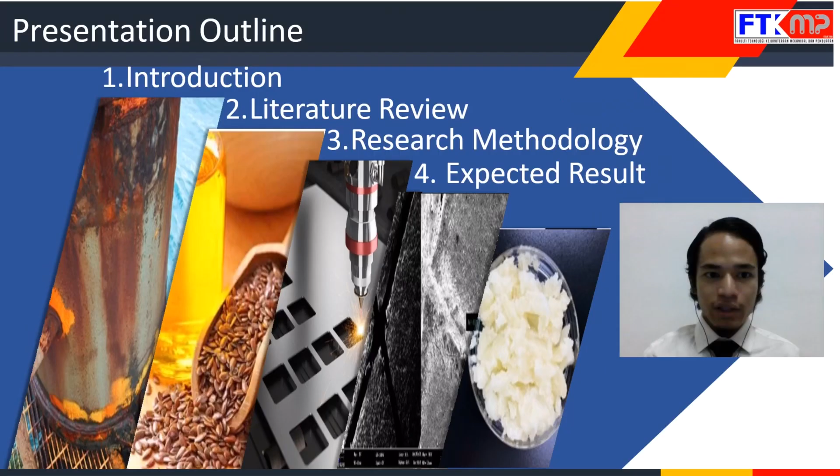My project is for PSM one. My topic is the comprehensive study on selective laser sintering 3D printer, polyamide recycled composition, and dimension measurement accuracy effect on automotive application. This is my main content.

Many in the industry now recognize 3D printing as a manufacturing process with widespread use. This 3D printing uses various materials like plastic and metals to make three-dimensional goods layer by layer based on a digital model, rather than using physical labor and mechanization. There's been an enormous expansion in this field, with dozens of equipment manufacturers and hundreds of thousands of 3D printed items already on the market.

What all of these processes and technologies have in common is the manner in which production is carried out, layer by layer in an additive process, which is in contrast to traditional methods of production involving subtractive methods or molding, also called casting processes.

My research of 3D printing to be used is powder bed fusion, which is selective laser sintering (SLS). This method uses either an electron beam or laser to melt or fuse the material powder together. The material used in this process is polyamide 12.

Selective laser sintering (SLS) is an example of the powder-based 3D printing technologies, and selective laser sintering can be used to create metal, plastic, and ceramic objects.

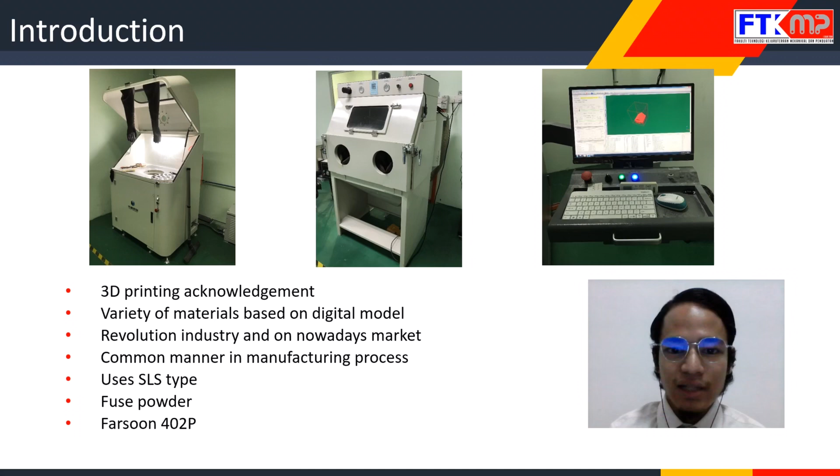My study evolved into three problem statements. The first one is SLS polyamide 12 has a grainy surface. The second one is the necessary dimension may not be obtained due to shrinkage. And the last one is which polyamide 12 composition percentage is the superior one.

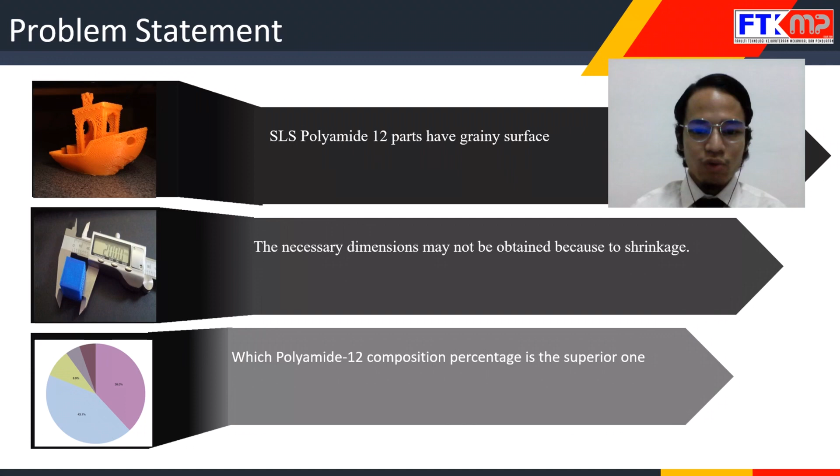My study comprised of three objectives. The first one is to optimize the composition of virgin material, unsintered material, and recycled material of polyamide 12. The second is to obtain high precision and accuracy of the produced part. And the third one is to acquire the guideline for a superior composition of polyamide 12.

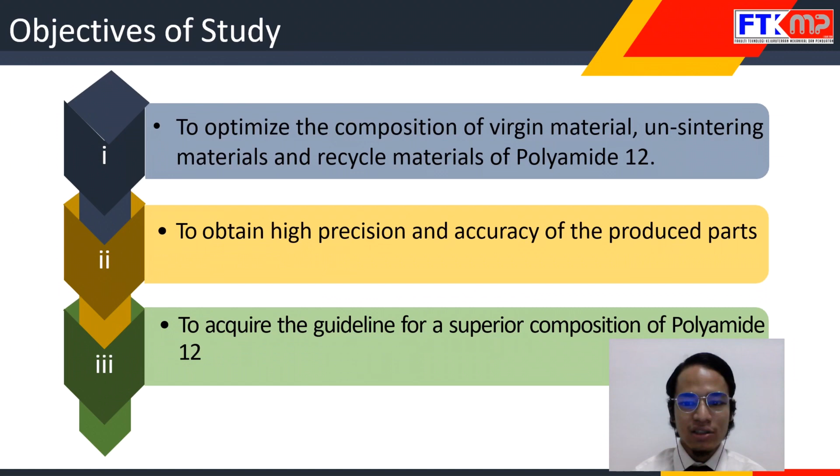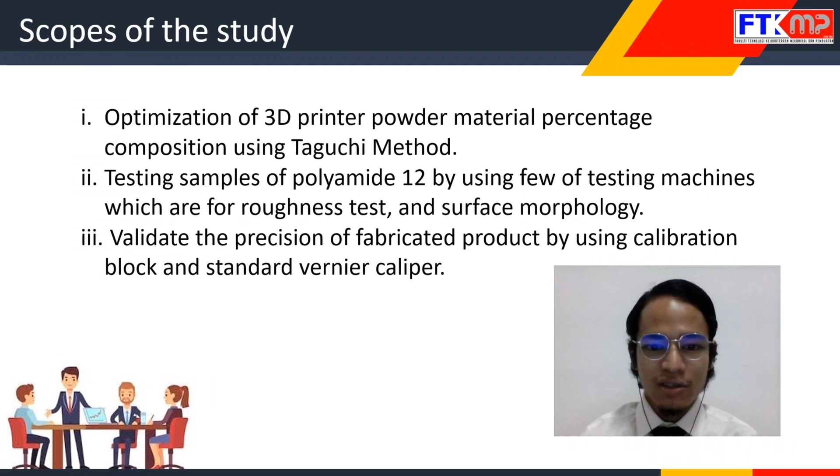Scopes of study: first is optimization of 3D printer powder material percentage composition using the Taguchi method. Second is to test the sample of polyamide 12 using a few testing machines, for roughness test, surface morphology, and dimension accuracy. And the third is to validate the precision of the fabricated product by using a calibration block and standard vernier caliper.

Literature review part: the first question is what types of 3D printing technologies are used nowadays. The first one is binder jetting. Binder jetting is a rapid prototyping and 3D printing process in which a liquid binding agent is selectively deposited to mix powder particles. The second one is directed energy deposition, a more intricate printing process commonly used to fix or add additional material to existing components.

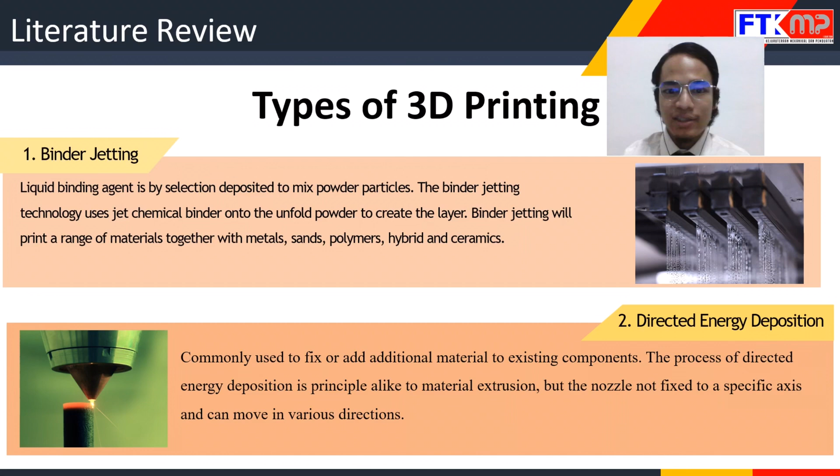The third one is material extrusion. Material extrusion-based 3D printing technology can be used to print multicolor and multi-material printing of plastic, living cells, or foods. This process can create totally functional product parts. Fused deposition modeling (FDM) is the first example of a material extrusion system.

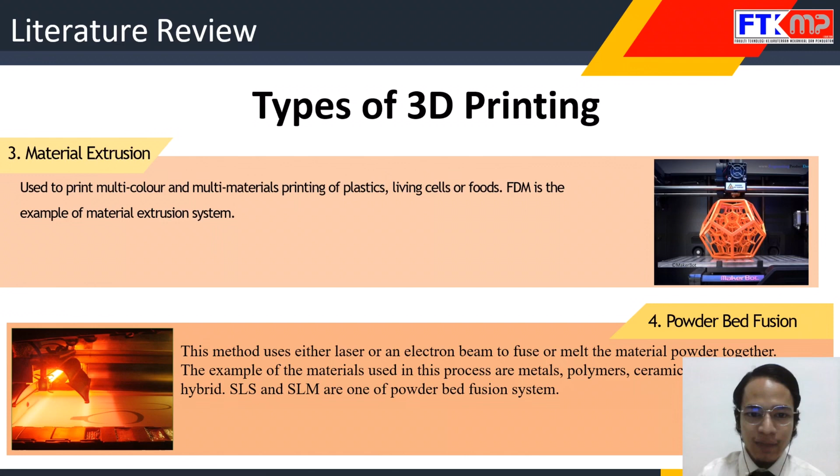The fourth one is powder bed fusion. The powder bed fusion process comprises selective laser sintering (SLS). This method uses either a laser or an electron beam to fuse or melt the material powder together. Examples of materials used in this process are metals, polymers, ceramics, composites, and hybrids. Selective laser sintering is the core example of powder-based 3D printing technology. Powder bed fusion is divided into two categories: selective laser melting and selective laser sintering.

The fifth one is material jetting. According to the ASTM standard, material jetting is a 3D printing process in which drops of build material are selectively deposited. In material jetting, a printhead dispenses droplets of photosensitive material that solidifies, building a part layer by layer under UV light. Simultaneously, material jetting builds components with fully smooth surfaces and high dimension accuracy.

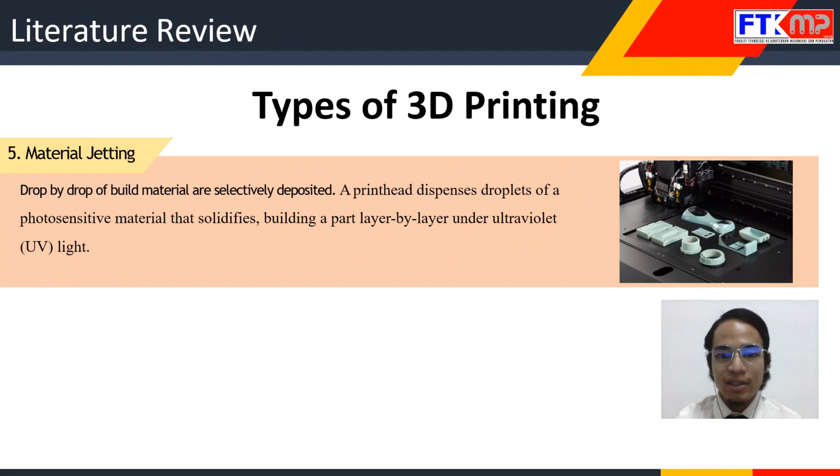Application materials for each 3D printer: the second one is SLA, and the third one is SLS. Each of these 3D printers has its own advantages, disadvantages, applications, and materials.

The application of FDM is mostly for basic proof of concept models. SLA is used for functional prototyping, pattern molds and toolings, dental applications, jewelry prototyping and casting, and model making. SLS can be used for a variety of things such as functional prototyping, short run, bridge, or custom manufacturing.

The typical materials for these 3D printers: for FDM, standard thermoplastics such as ABS, PLA, and their various blends. SLA uses many types of resin and thermosetting plastics—standard engineering, ABS-like, PP-like, flexible, heat resistant, castable, dental, and medical biocompatible types. SLS, as we know, typically uses nylon 12 and nylon 11, and other composites.

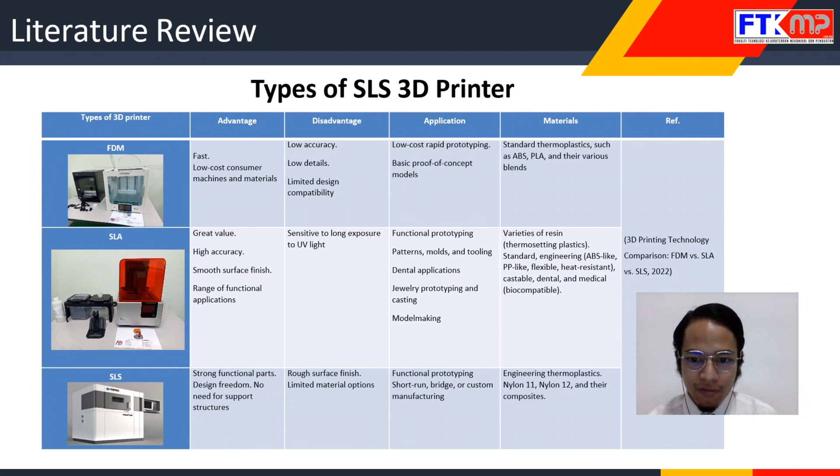There are 4 main tests that we run for my specimens. The first one is a hardness test. We use the Mitutoyo Rockwell hardness test to determine the hardness of the material by measuring the net increase in imprint depth as a force is applied. Values such as R, L, M, E, and K scales are often used to represent the hardness number, which have no unit.

The next test is surface morphology. We use SEM, the scanning electron microscope, which is a tool for creating images of the otherwise invisible world of the microscope—the invisible world of a microspace. SEM has the ability to magnify an object up to 300,000 times. An SEM image typically includes a scale bar, which is used to calculate the size of the image feature.

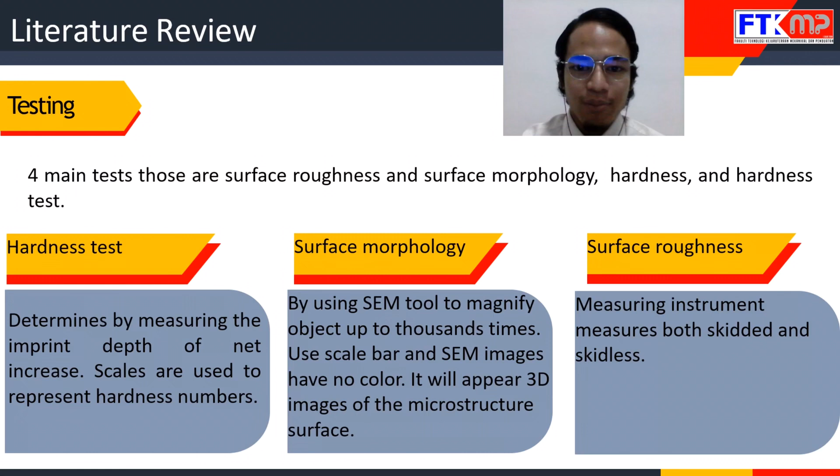The next one is the surface roughness test. We use the Mitutoyo SJ 410 surface roughness measuring instrument to measure both skidded and skidless surfaces. The SJ 410 includes 46 roughness parameters that meet the most recent typical standards.

For materials, there are 3 types commonly used. The first one is metals. Metal 3D printing technology is gaining attention in aerospace, automobile, medical applications, and producing trade as a result of the benefits of this process.

The next material is ceramics. Currently 3D printing technology can manufacture 3D printed objects using ceramics and concrete without massive pores or cracks, through optimization of the parameters and setup, achieving great mechanical properties.

The last one is polymer. 3D printing technology is widely used for the production of polymer components, from prototypes to functional structures with tough geometries. 3D printed polymer materials in liquid state or with low melting points are widely employed in the 3D printing industry thanks to their low cost, low weight, and process flexibility.

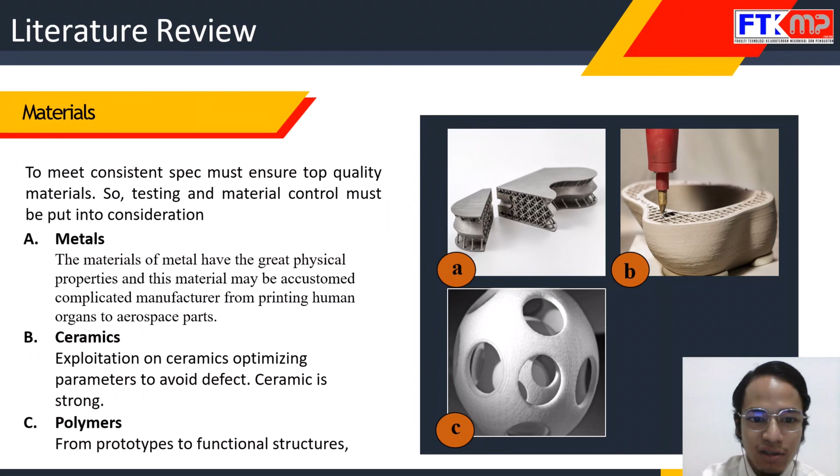For polymer mechanical properties, 3D printed polymer parts have different mechanical properties compared with traditional methods. Polymer has the advantage of flexibility, so it has less stiffness compared to other manufacturing methods.

Here is the table of the mechanical properties of the polymer, which is comprised of crystalline and amorphous types. We use the crystalline one.

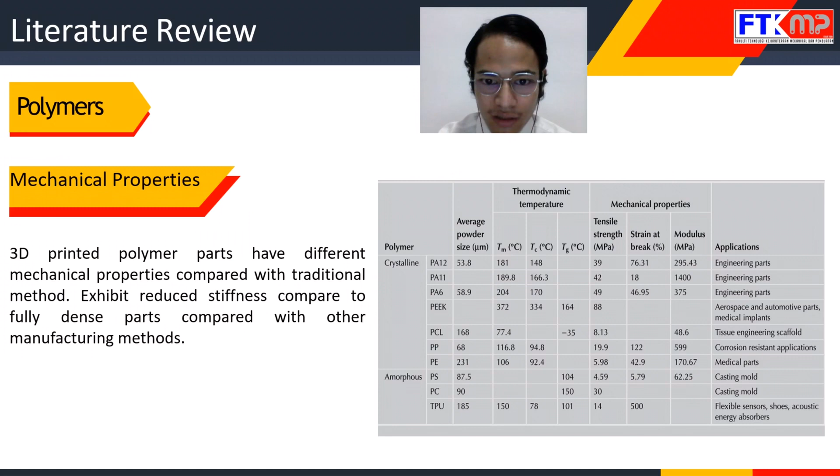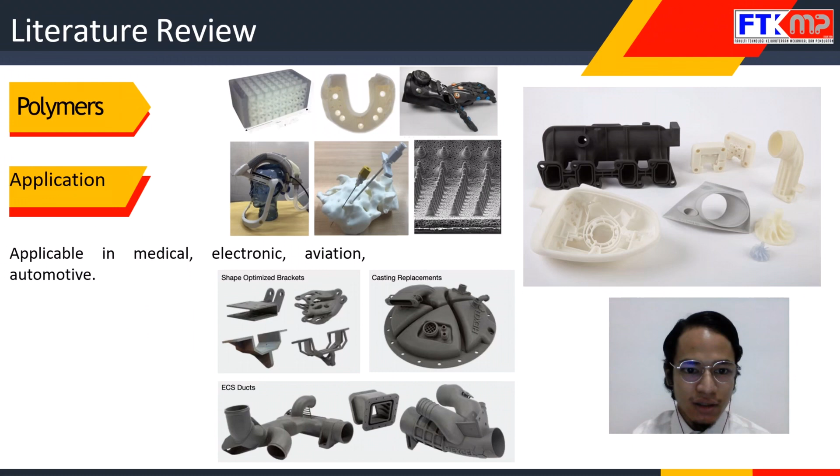This shows the typical polymer applications. For 3D printing products, common applications include medical, electronic, aviation, and automotive fields. For the melting points of the polymer, as you can see in the pyramid stage...

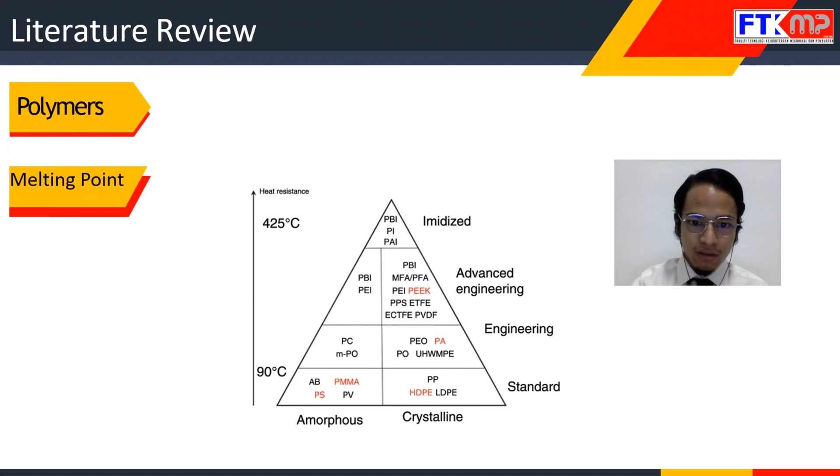This is the typical designing software, the main ones. We can use Autodesk generative design. The second one has parameters—it uses a reverse engineering tool.

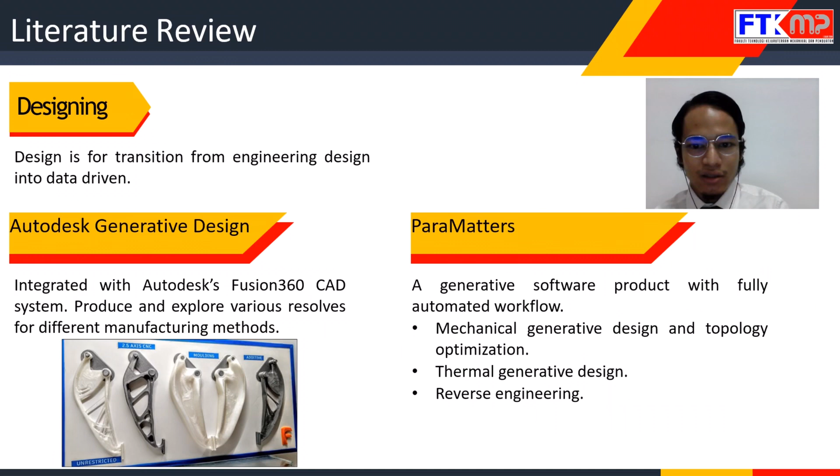The next designing technology, which is what I will be using for my research, is the Farsoon Technologies Software Solution. For this Farsoon Technologies, we use two types of software for designing: the first one is BuildStar, and the second one is MakeStar.

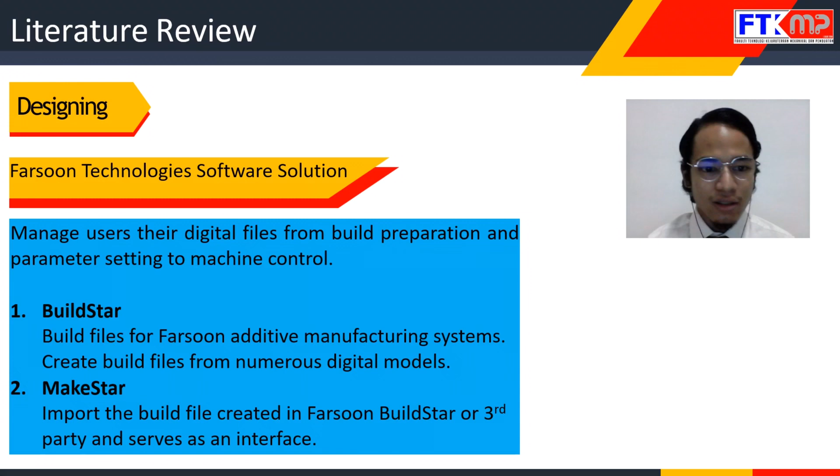The laser power influences the pace of the initiation reaction in the current model, and the active center formation rate varies greatly for different laser powers.

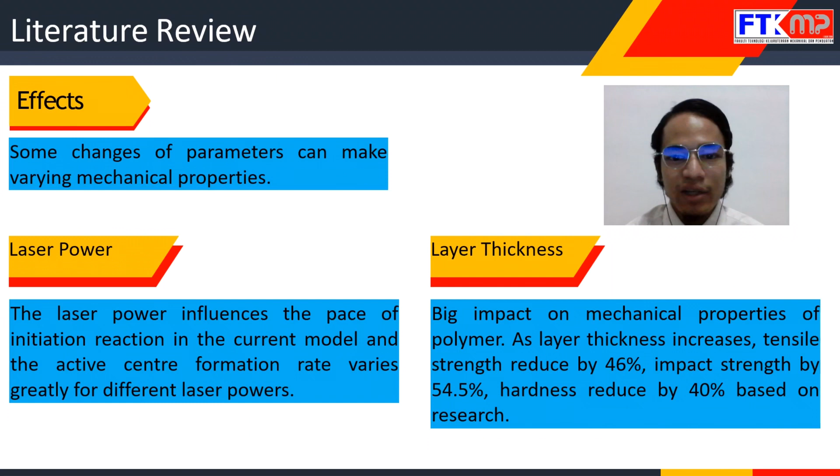The second consideration is the layer thickness. Based on a study from Shubham in 2016, tensile strength is lower by 46%, impact strength is reduced to 54%, and hardness is reduced to 40% as the layer thickness increases, with the exception of the 0.5 mm layer thickness. So as the layer thickness increases, the mechanical characteristics of the material also diminish. This is the research gap I have collected during this period for my PSM1.

There are four studies that I have read.

The first one is from Encik Rafi himself. His study covers laser power, chamber temperature, laser speed, and layer thickness as the parameter variables he put into scope, and the material is polyamide 12, which is the same as what I will be using. The study includes virgin material, recycled material, physical properties, roughness, and surface morphology tests run in the research.

The next one is Yang 2020, covering parameters around tensile strength, elongation, onset temperature, scanning spacing, layer thickness, laser power, and laser speed. It also used polyamide 12 material. It ran several tests, which are surface morphology and hardness, so there are only two. It also covers physical properties, recycled material, and virgin material.

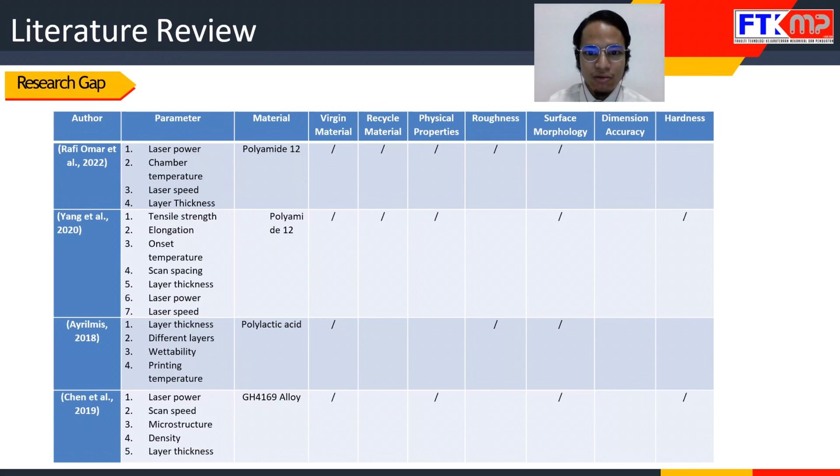This is the methodology for chapter 3, as you can see in my flowchart.

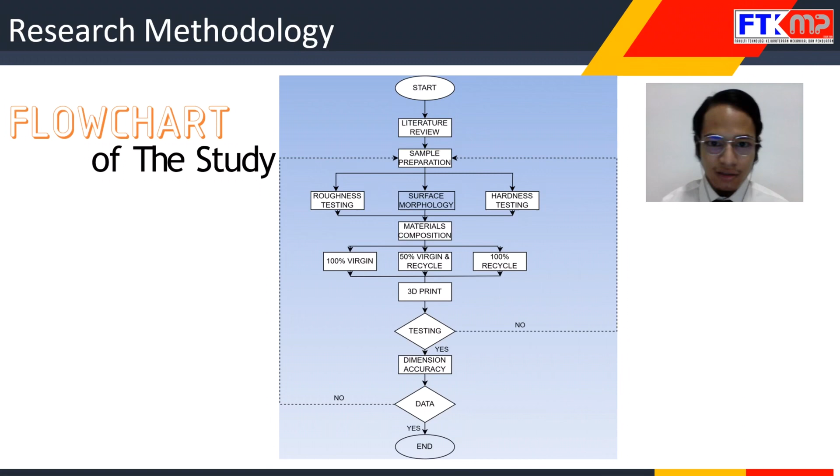My research methodology, the first one is of course the literature review. For this literature review, before I run my experiment, I have to read several previous researchers within a 5 year gap. From these research studies, I can learn many things I have never learned before, around my scope, which is 3D printing SLS using the material PA12.

From here I can see what their research is about, what their study scope is. It's the same as the last one I explained, which is the research gap. I can see what testing methods they use, what materials they use for their studies, and from there I can get many sources that will be useful for my study in this phase one.

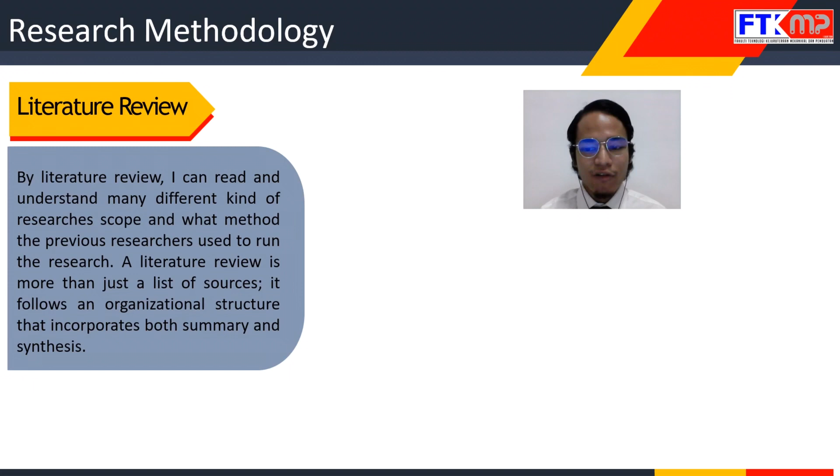The next step is sample preparation. For my sample preparation, I will cut the specimen of PA12 with a dimension of 10 mm by 10 mm area, with different composition for each specimen.

After that, I will run several tests. The first one is the hardness test. For the hardness test, we use the Rockwell R hardness with the parameter specific to PA12, according to the ASTM standard.

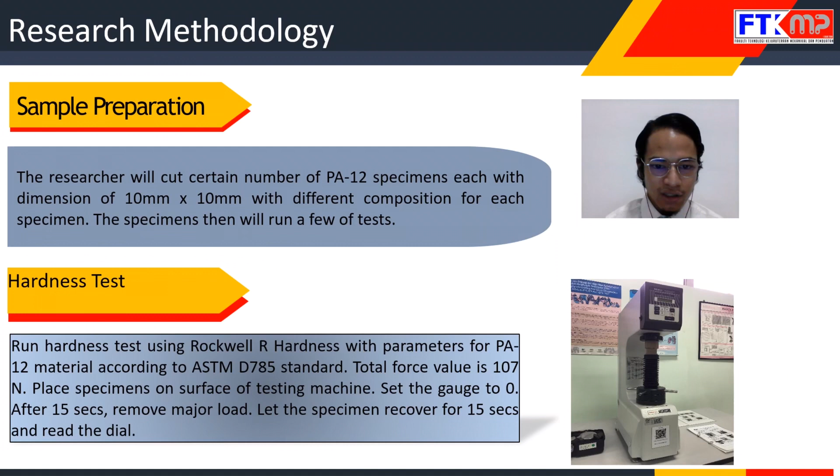The total force value is 107 Newton, and then we place the specimen on the surface testing machine and set the gauge to zero. After 15 seconds, I will remove the major load, let the specimen recover for 15 seconds, and read the dial.

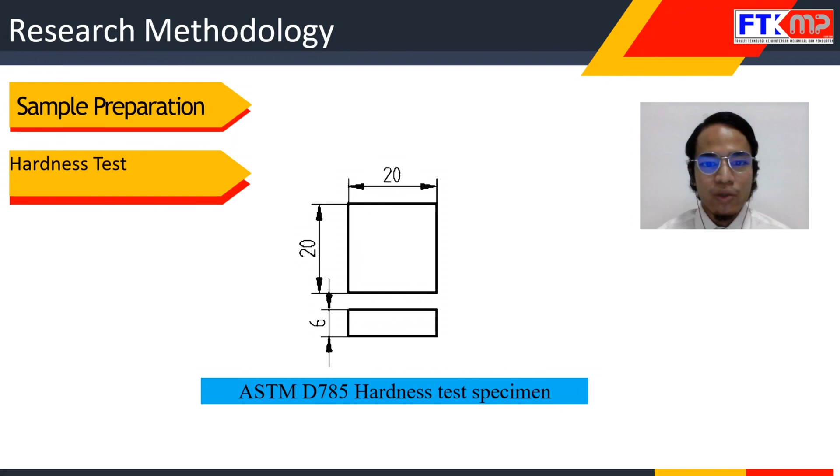The next test will be the roughness test. After running this experiment, I will obtain the values of Ra, Rq, and Rz.

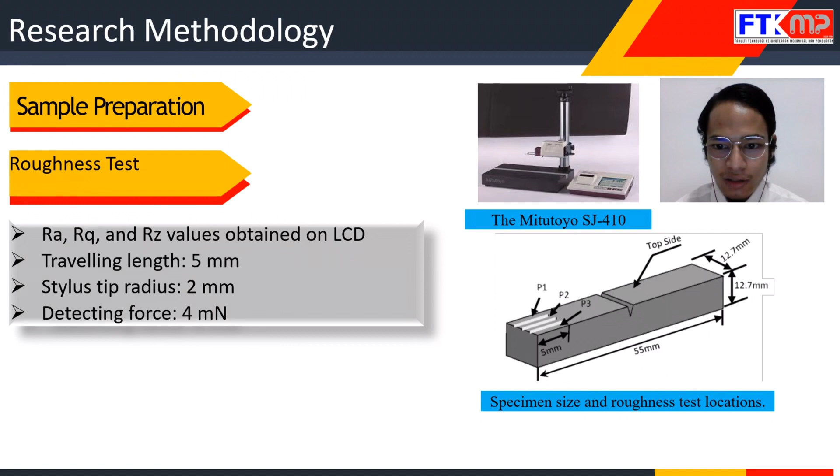So it will display on the LCD screen of this machine. The parameters that I will set are travelling length of 5 mm, stylus tip radius 2 mm, detecting force 4 millinewton, and this specimen size. This is according to the standard to run the roughness test.

The next test will be surface morphology. Before I run this test, I have to coat the specimen first and set the range between 0 to 90 degrees, and set the magnification for 50 micro and 100 micro, and the EHT value is 15.

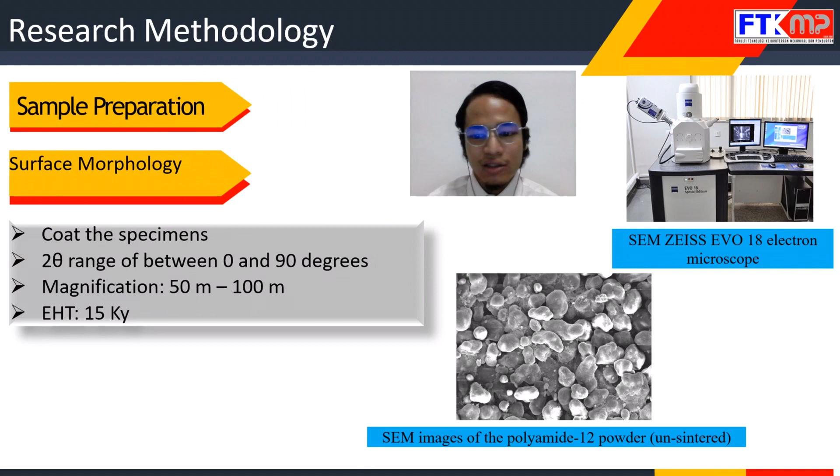This is the testing machine that will be used, SEM ZEISS EVO electron microscope, and the pictures below describe the example of SEM image that I will get. But this one is for the polyamide, the unsintered one, so it's before the heating process.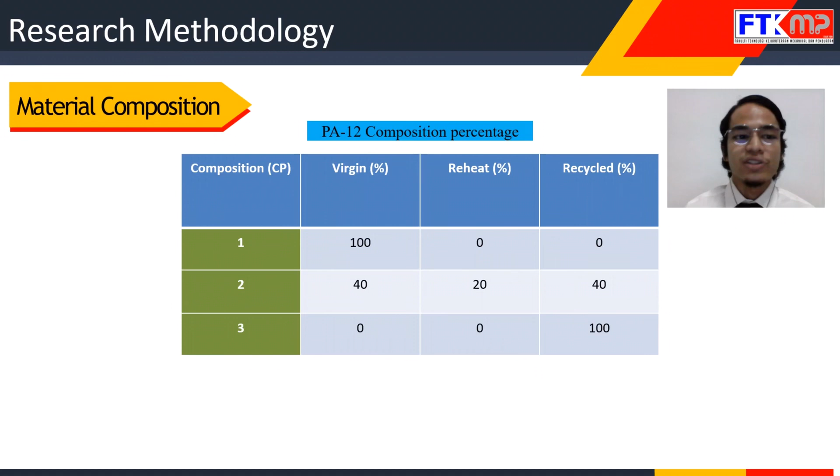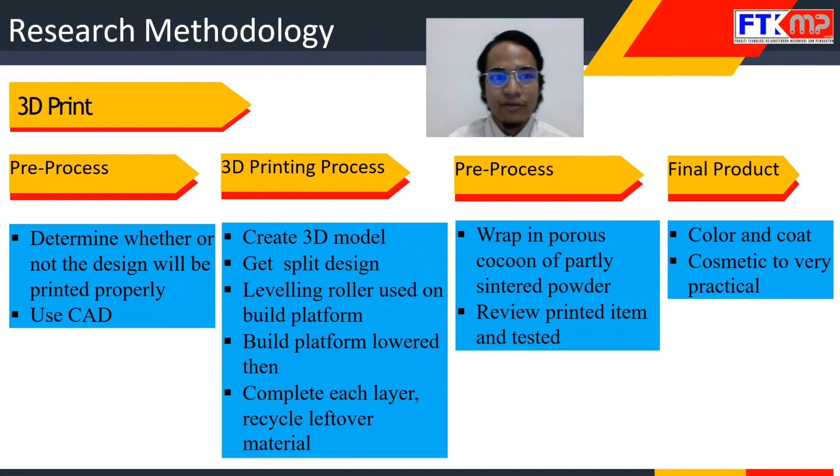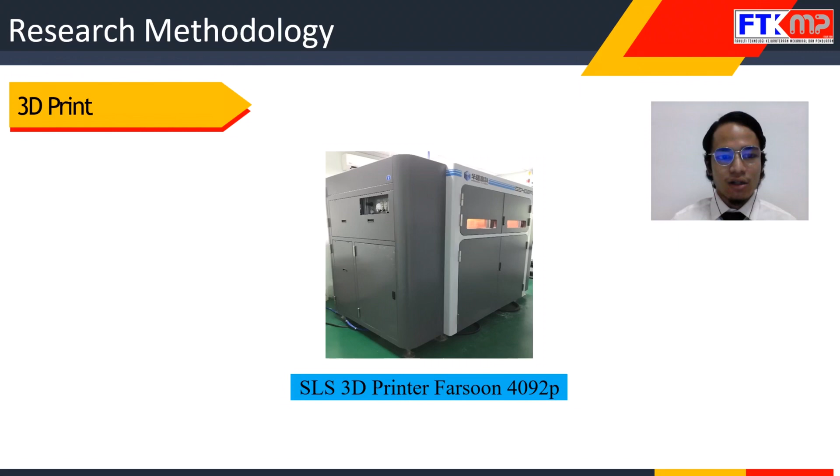The picture here shows the SLS 3D printer type that I will be using, which is Farsoon 4092P.

So the last testing, which is my main objective of this study, is for the accuracy itself.

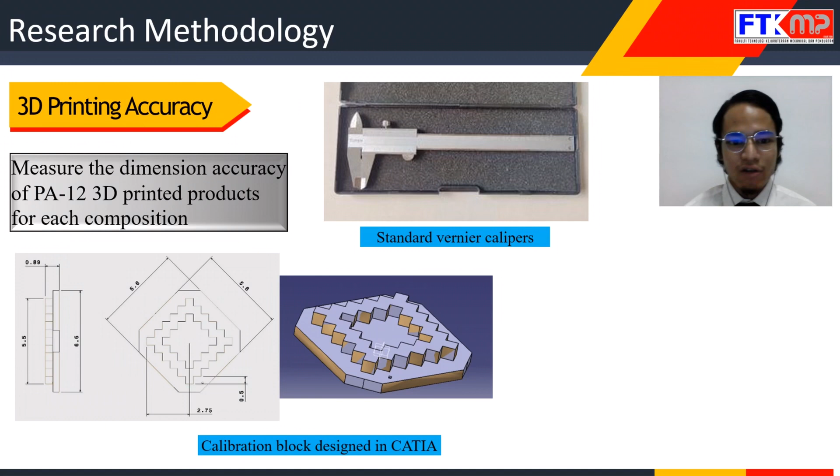After running the several tests, I will be printing by prototyping the specimens, and after I receive the products, the products are standard blocks dimension. I'll be using these tools, standard vernier calipers and the calibration block, to measure the accuracy of the 3D printing. This is the product design.

As you can see, this is the typical blocks. From here I can use the tools I mentioned before, the vernier caliper and the calibration block, to get the accurate dimension.

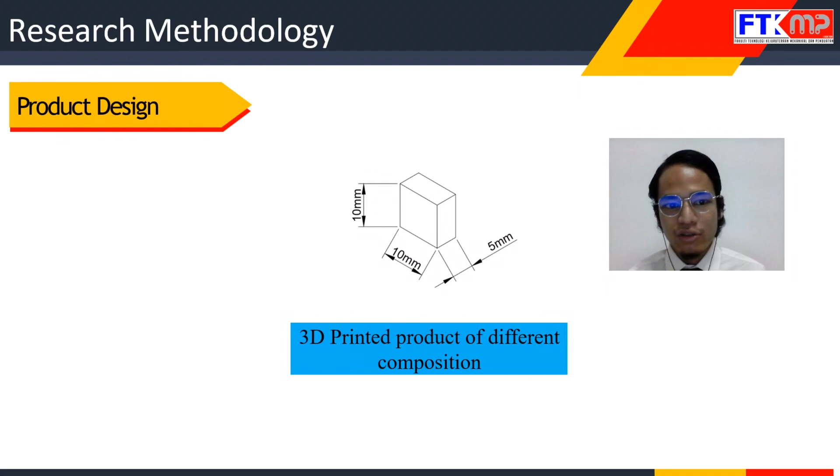So even the tiny bit of the millimeter, I will put into consideration for the accuracy itself. I will compare this dimension from the previous specimen to the produced part of the 3D printed polyamide 12 products.

So this is my expected result. The things I have to put into consideration are the factorial input parameters and the expected testing result. This expected result is the byproduct of my several tests mentioned, which is hardness test, roughness test, surface morphology, and the last one is dimension accuracy, which is my main objective of this study.

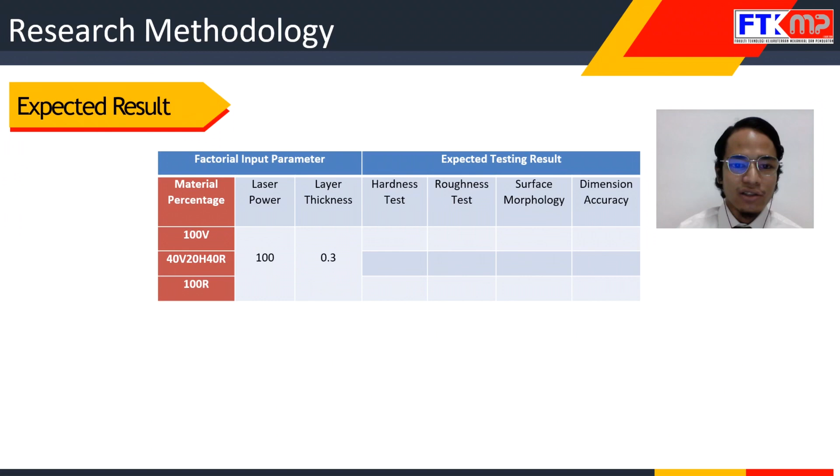The testing will be conducted based on my material percentage composition, which is shown as 100V meaning 100% virgin, and 40 meaning half virgin material and recycled material, and the last one is 100% recycled composition. The laser power and thickness are fixed, standing at 100 for laser power, and thickness is only 0.3. I think that's all from me.